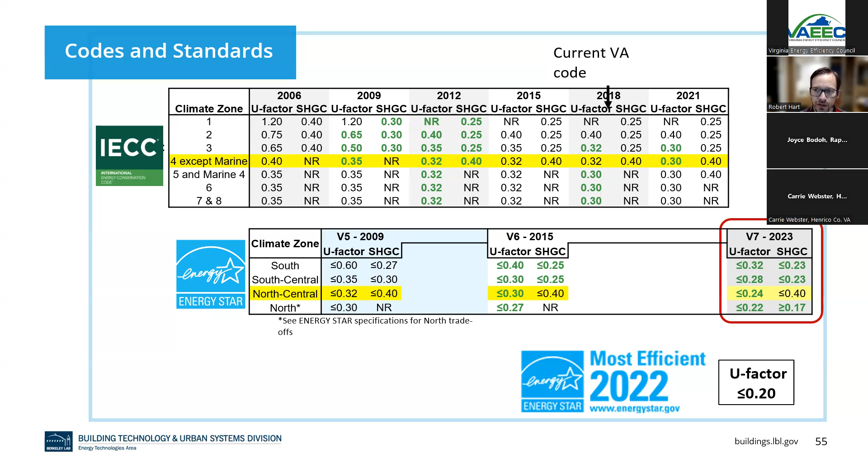So go ahead to the next slide, please. There's one additional item I wanted to highlight here, which is that there has been a slight change in the map from Energy Star. In version 6, and I apologize, that looks fairly blurry, but I think you can still make it out, basically all of Virginia in version 6 was North Central zone.

for Energy Star. In version 7, it has changed a little bit. You can see there are a couple counties that are in the northern zone, and a few, I don't know if that's one county or multiple, sorry, I don't know Virginia very well, but that have moved to the south central zone. So a majority is still north central, but you do have a couple pockets where it's north or south central. So that's something to consider if you're working on projects in those areas, that the Energy Star requirement is actually going to be a little bit different there. Go to the next one, please.

Somebody noted it's multiple counties. Yeah, thank you.

Before finishing off on these codes and standards, let's look at where things are going. You saw the movement in the Energy Star space. If we look at the next IECC version, the 2024 IECC, which is currently under consensus committee process, it's going to move into that void now created. At least at the current proposal, which I think will be accepted and finalized, it's going to move into Energy Star version 6 levels.

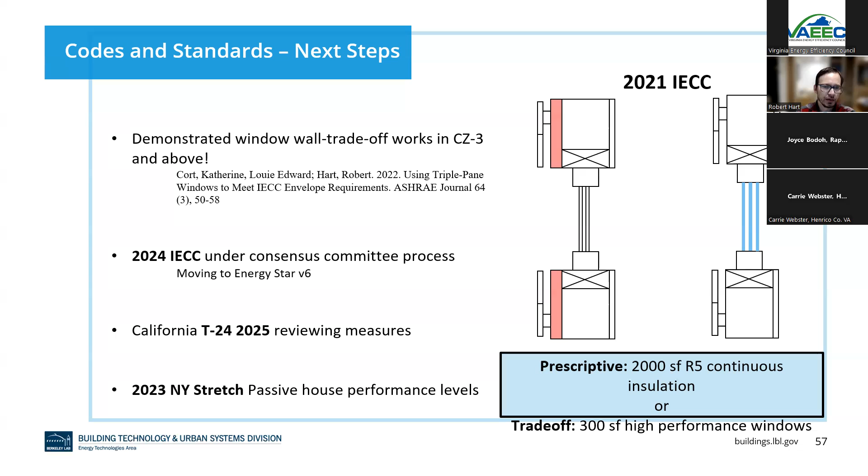If you're interested in a deep dive on achieving Energy Star and the technology needed to get there, I did a few presentations for NFRC, the National Fenestration Rating Council, on this. It gets pretty technical, so I didn't want to dive into it here, but if you're interested, these slides are available—feel free to check out these YouTube links to get a deep dive into how manufacturers can hit these performance targets.

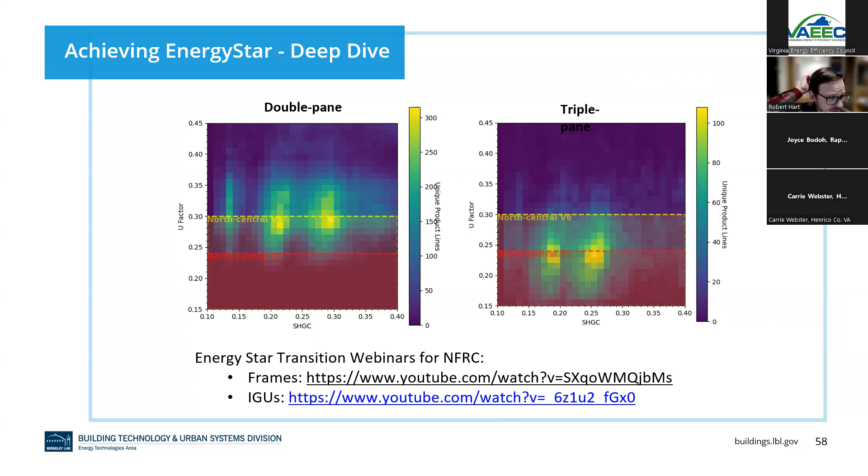So here I'll do the quick summary version. That's the 0.30 level that's being utilized now. This is your typical vinyl window with one low-E coating, a solar control low-E coating, with argon gas fill.

The difference now to that 0.24 level, which Energy Star is moving to, is the addition of a second low-E coating. This is a room-side low-E, often called the surface 4 coating, being added to the window. So you're adding one more thing, which adds some cost to the window. You'll also see higher performance spacers, or warm edge spacers, being utilized in these products. So that's the technology jump there.

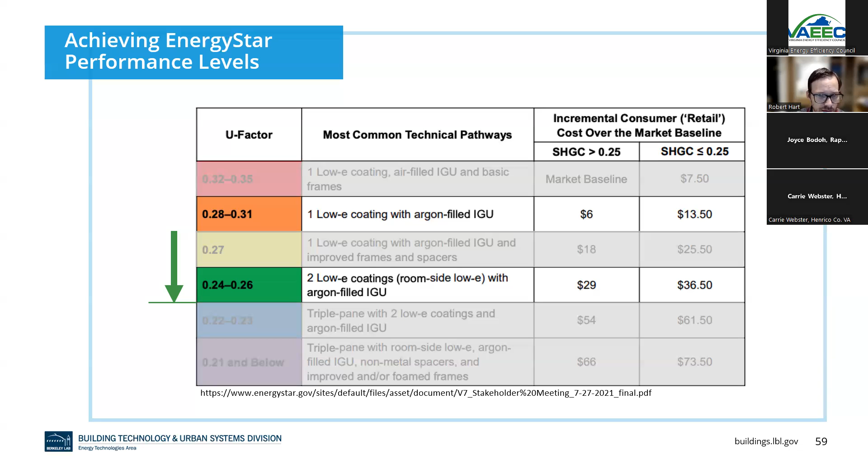So here's a summary of the two technologies that would be utilized to do that. That room-side low-E coating, which I talked about, is a widely available technology. It's been around for a long time, with multiple suppliers. The cost right now is more expensive than a typical low-E coating.

Initially, with the launch of Energy Star, this might get more expensive with demand going up, but the coaters, the glass manufacturers, are going to invest in broadening these lines. It's going to become more of a mass market product. We anticipate the cost ultimately coming down, the incremental cost for that coming down in the long run.

Triple pane windows are obviously another option to get there. Again, a product that's not sold very much in the US—only about 2 to 3% of the market share. Although the technology has been around a long time, and there are a lot of manufacturers that actually have certified products, they just don't sell them.

If we look at the database from NFRC, more than 190 manufacturers have more than 400 product lines certified, and this is just vertical sliders, not to mention all the other product lines certified in the US. So the manufacturers are prepared to do this, they just haven't done it at scale right now, so the incremental costs are quite high. If that market changes, demand changes, and they invest in their technologies to produce these at higher volume, you'll see those costs come down quite a bit.

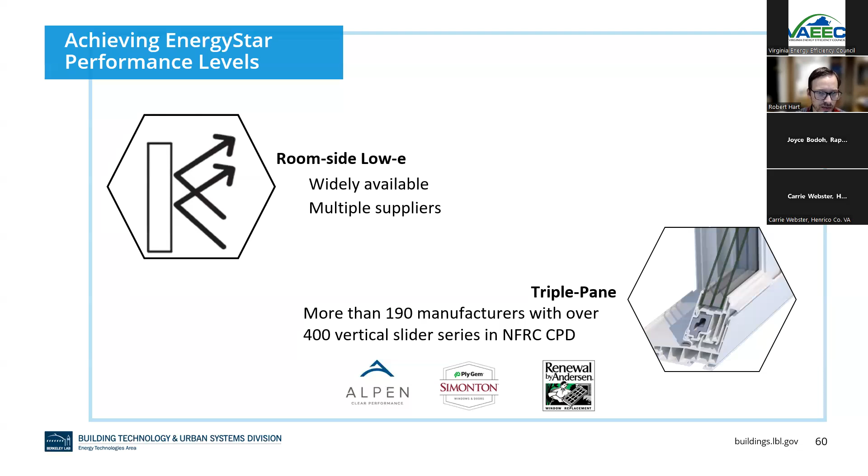One technology we've talked about for the last few years, and worked on with different manufacturers, is this idea of a thin triple window. The idea being that with a typical triple pane, you hear a lot of complaints about them being too heavy, too wide, too expensive. The thin triple is a way of addressing some of those problems.

The idea is somewhat of a drop-in replacement—the insulating glass unit can go into an existing frame that was designed for double pane. This means a low entry cost for window manufacturers. You get double the insulating glass performance with minimal weight increase. This is still a viable solution, and we're doing some demonstration projects. A few manufacturers have launched products with this technology, and we expect more in the next few years.

There have been some modifications to that. When we started this work, Krypton gas was very cheap and accessible. In the last few years, that has not been the case. Most of the Krypton gas is manufactured in Russia and Ukraine, for example, so that market is very volatile right now, and manufacturers, not surprisingly, are not willing to invest in something that volatile.

So there have been some modifications to the design—I won't go into all the details here—but there are solutions, and manufacturers coming out with products that more closely resemble a typical double pane window in weight and handling, while still achieving triple pane level performance.

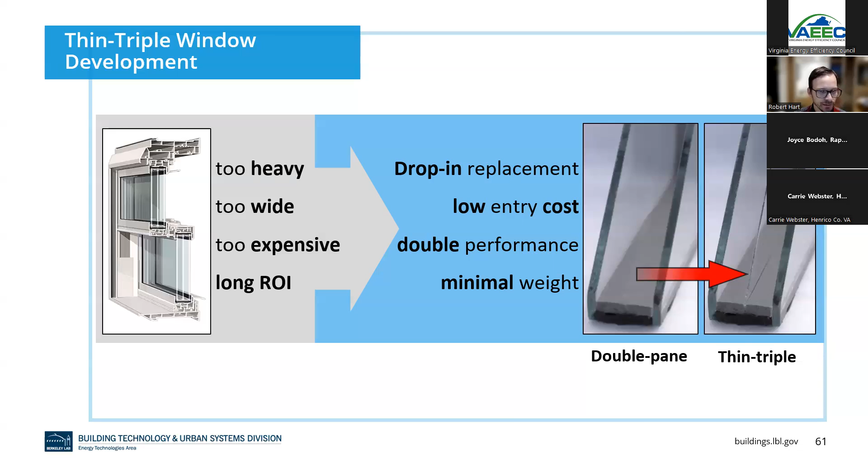I just wanted to touch on that. I've been focusing on the windows themselves here, but there are a lot of other technologies that allow, especially on the retrofit side, high energy savings out of the windows. So secondary glazings, whether that's on the outside, often called storm windows, or on the room side, which are window panels or secondary glazing on existing buildings, can give you quite a bit of energy savings at a lower cost than installing a new window. So that's always a very good option, especially in climates like Virginia.

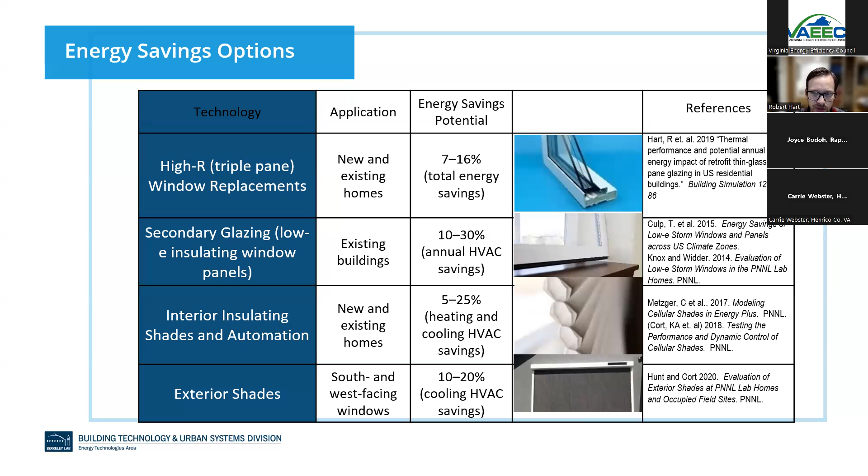But also shading systems, both interior and exterior, do a very good job, especially if you're concerned about overheating or solar gains. They do a great job of reducing energy use as well.

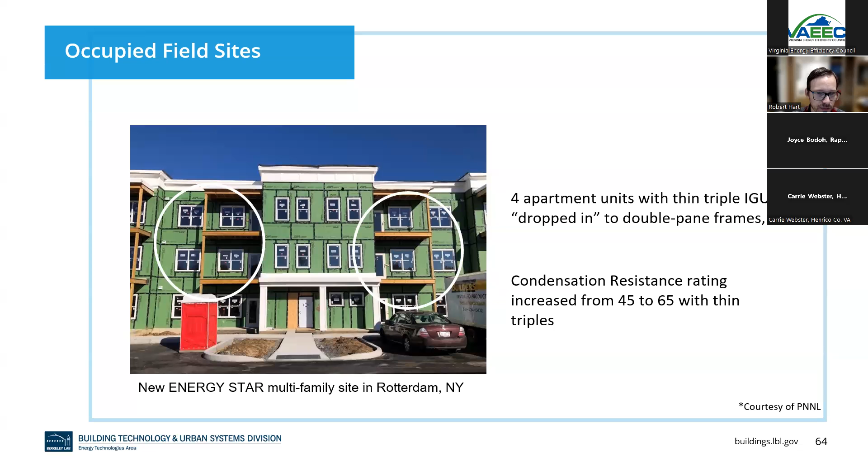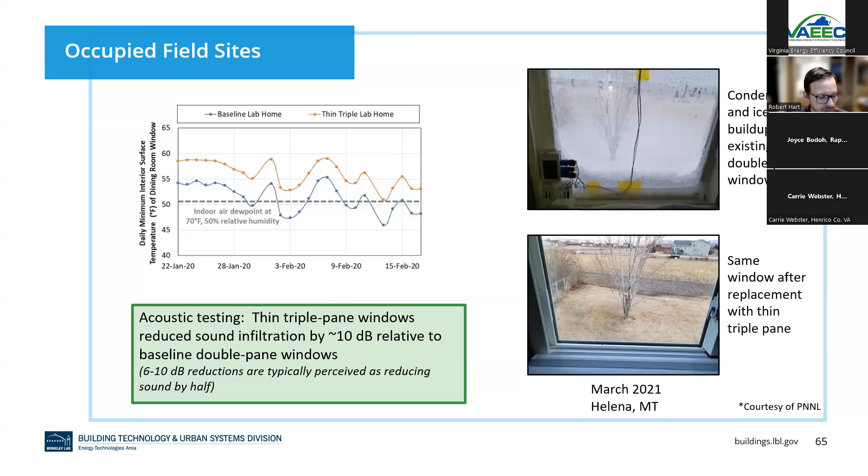We've just started this project. We're baselining the units right now, doing a year of data collection with the existing windows, and we're about 4 months into that. After 1 year, we retrofit with triple pane and do another year of data collection with the tenants to get a very good understanding of how this impacts their space and usability.

With a particular focus to these low-income communities. Go ahead to the next one, please.

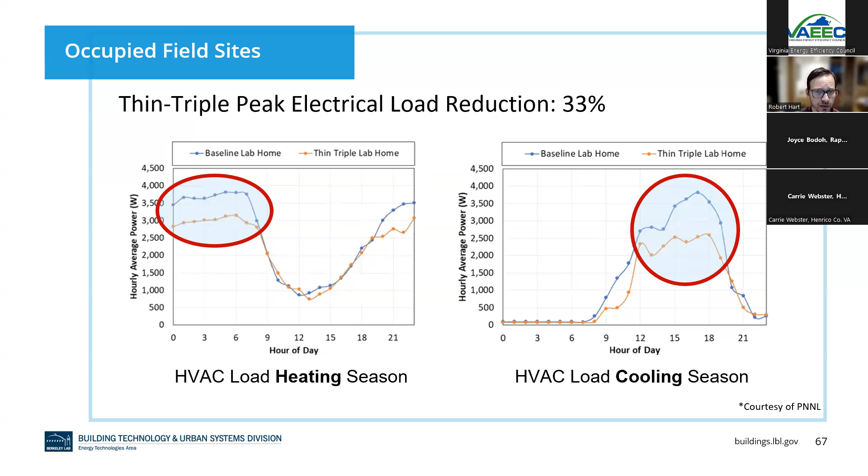And on the cooling side, this has somewhat to do with the insulation, but also the solar control level of these windows, so you have a lot lower peak for your cooling, being able to reject solar gains quite a bit better. So you get the best of both worlds: the morning warm-up in the heating season and the midday peak in the cooling season, where you're reducing these loads. Go ahead to the next one, please.

So at PAWS, we launched last year with 50+ partners. This involves manufacturers, a lot of utility groups, and others. We have 3 working groups going on right now. Our utility working group has 24 utility programs already as members. We're working on how to launch market transformation programs within these territories, and it's a great group of folks interested in how we get high performance products into their markets.

We also have quite a few pilot programs going on with some large production builders, including Habitat for Humanity and a few others that are interested in trying out these higher performance products in their fairly large 100+ home developments. So a lot of interest here, especially with these changes to Energy Star, in how we're going to get higher performance windows into the market. Go to the next one, but I think that was all I had.

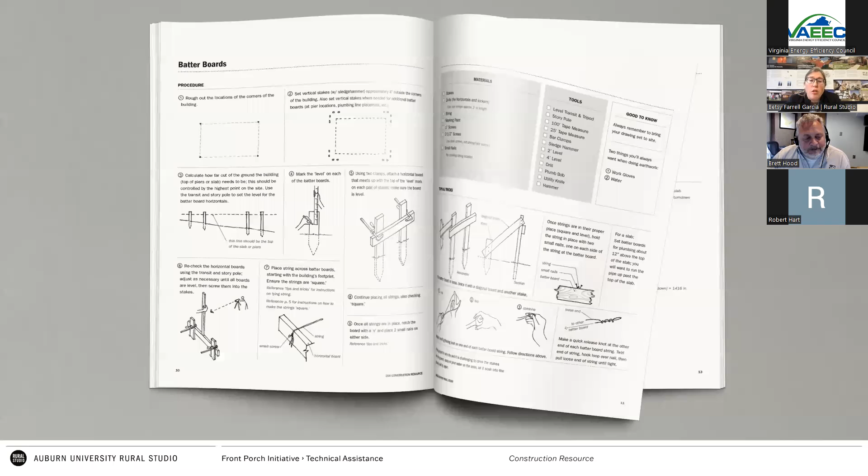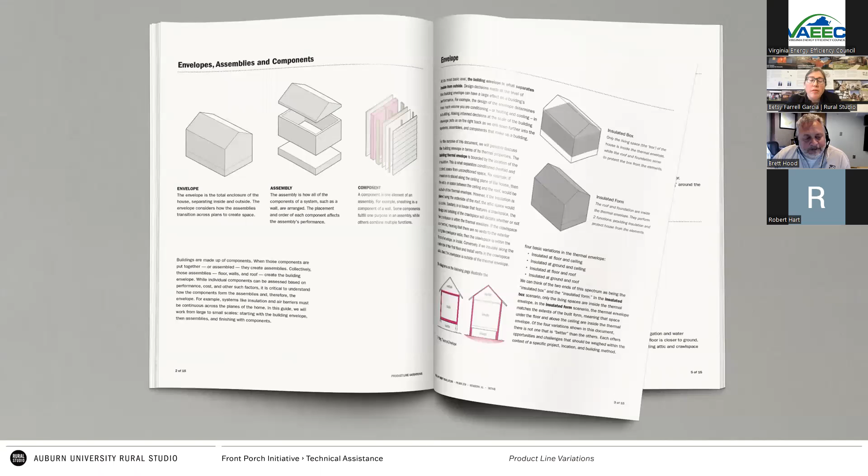Over the years, our team has developed an instruction manual that helps our students and partners understand the hows and whys of high-performance home building. As part of our technical assistance program, we've developed a library of materials illustrating the range of variations possible. We understand how to design to a high standard of building performance and can measure the impact different assemblies can have on that performance.

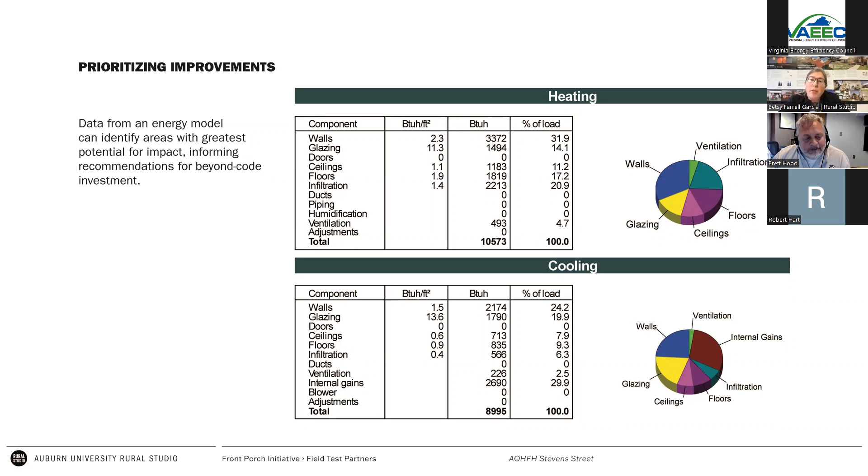Ultimately, we aim to study the relationship between high performance building and affordability, and how one can affect the other. Affordable housing often focuses on lowering the initial construction cost to the detriment of building performance. We seek to find the balance point between the upfront cost of improved performance and the back-end performance consequences or benefits.

By investing in improved efficiency and durability in a healthier home and surrounding community, can we lower the homeowner's energy bill and insurance premiums and reduce chronic illness? We began to wonder if we could shift a homeowner's monthly expenses to investment in improved performance. Although it would cost more initially, we hypothesized that a high-performance house would actually cost the homeowner less over time. Moreover, we know the benefits extend beyond the homeowner. Research has shown that energy efficient homes are less likely to go into default, which creates value for lenders.

Resilient homes save an average of $4 for every dollar invested, and have a higher resale value. We also know healthy homes influence occupants in a number of ways, including a reduction in sick days, a benefit to employers, and fewer doctor visits, a benefit to insurance providers. We also know that communities that remain intact are stronger, such as multi-generational kinship networks that offer elder and childcare, as well as shared transportation and food. And many of the principles for one goal overlap those of another.

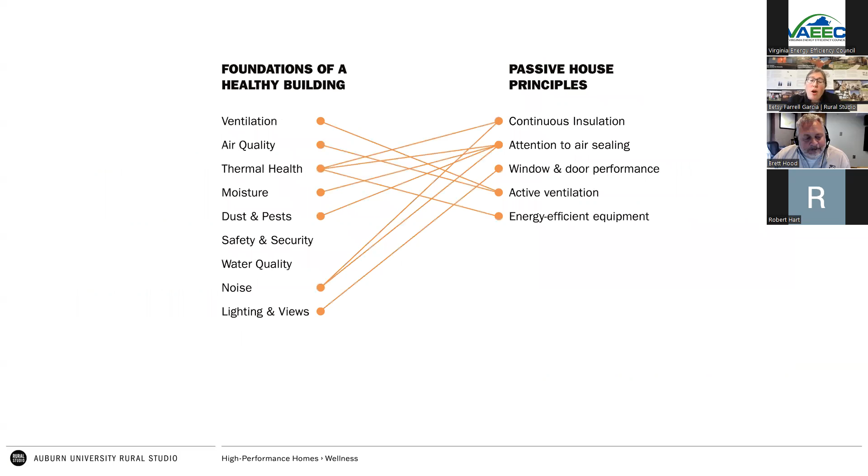We're currently working with a network of housing providers across the Southeast in climate zones 2, 3, and 4. Front Porch Initiative provides the information, knowledge, and know-how to help our partners make informed decisions regarding both the quantitative and qualitative aspects of building performance, so they can provide energy efficient, resilient, and healthy homes to their clients. Today, Mackenzie and I will share case studies with two of our housing provider partners and close with key takeaways we're incorporating into our ongoing work with partners.

One of our early partners, Auburn Opelika Habitat for Humanity, is the Habitat affiliate nearest main campus, and they offered us an opportunity to integrate a research project into the design and construction of two of their recent homes. This research investigates the relationship between initial construction cost and ongoing operating costs related to energy performance. To minimize variations in built performance, we identified two lots on a common street and constructed two of the same houses, a 900 square foot, 2-bed, 1-bath prototype.

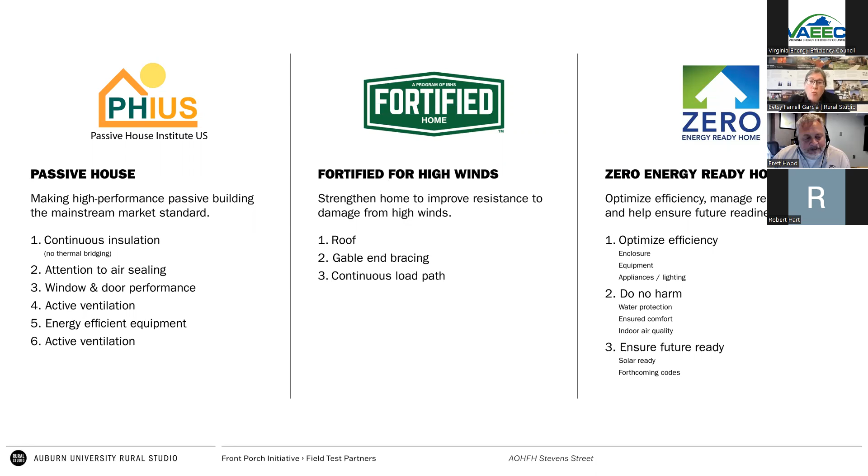They're built to two different energy standards and the same structural resilience standard. We elected to build to the more stringent standard first, then applied our understanding of the PHIUS standard to construct to the Zero Energy Ready standard, reducing construction costs while maintaining as high a performance as possible. Our students ensured that construction met each standard through a 4-step process: modeling, working through various assemblies computationally, testing the airtightness of the envelope at critical points during construction, verification of final performance through independent third-party raters, and monitoring energy consumption at the circuit level.

For two years, we monitored the energy required to heat, cool, and ventilate the homes, and tracked the cost of that energy consumption for each house. We focus on the energy needed to condition the interior since it's most directly related to how the house is built. We then identified the added construction cost of key building systems needed to meet each standard, and found that the added construction cost to meet the higher standard, taken as a cost increase on a monthly mortgage payment, did not result in similar savings. This proves that we could achieve comparable performance at a much lower cost premium.

Finally, the PHIUS standard requires a small solar array to offset some of the energy use of the home. This PHIUS house is unique because it's the first house in Opelika, Alabama to have a bidirectional meter, eliminating the need for costly batteries. The project team petitioned the local power co-op to allow this meter, and the policy changes made it possible for other homeowners in town to install their own solar arrays, contributing to the economic stability of the wider community. Now, Mackenzie will share our second case study.

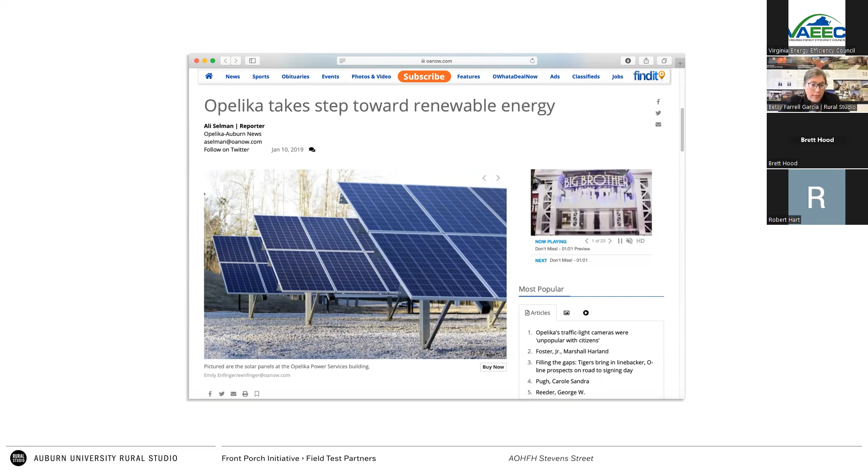This second case study that we're going to look at today is with Chipola Area Habitat for Humanity, and specifically a development of four homes in Marianna, Florida. For this project, we integrated learning from the project with Auburn Opelika Habitat for Humanity around efficiency and resilience, and we expanded our research around both workforce and finance.

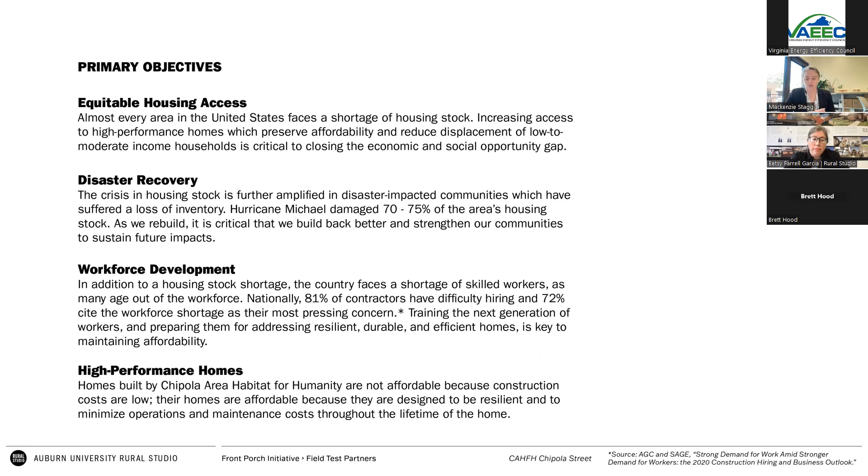Early on in the project, we identified four primary objectives. First, to increase opportunities for equitable access to homeownership. Second, increasing the area's housing stock as part of the recovery from Hurricane Michael, which damaged or destroyed a significant portion of the area's housing stock. Third, to build a skilled local workforce trained to both recover from disaster events and to mitigate future shocks. And fourth, build high-performance homes that continue to be an asset for the homeowner.

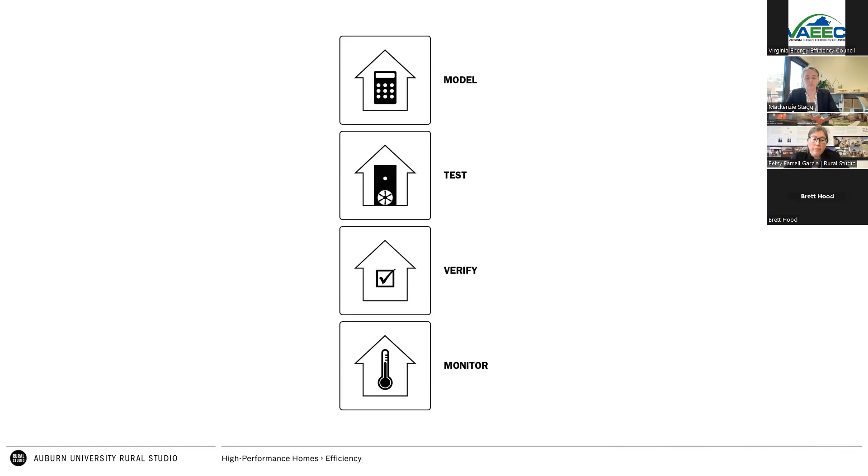We utilized the same model, test, and verify approach that was developed when working with Auburn Opelika Habitat for Humanity, and this has become an approach that we have used with all of our housing provider partners.

The Beyond Code certifications that we chose to pursue on this project were tied to funding opportunities for the housing provider and the financial institutions involved in the project. For example, Chipola Area Habitat was able to receive funding for development when building to a Beyond Code energy standard. We'll talk more about this later, but energy certification also had benefits for the financing of the home.

Chipola Area Habitat for Humanity also received a grant from Habitat International's Habitat Strong program to pursue fortified certification, which is about resistance to storm damage. However, they received this funding after the first two of the homes were already under construction, which necessitated rebuilding some small pieces of the project.

If at all possible, we would suggest that it's best to set expectations about certifications in the design phase of the project. However, just as a side note, since Florida has some of the strongest building codes around wind resilience, the modifications were not as strong as they would have been in another state, and that was part of what made them possible.

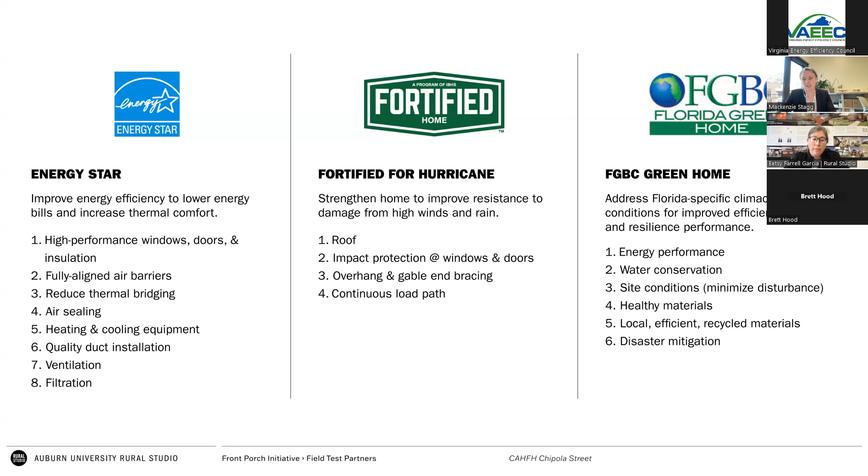Lastly, this was the first time that our team had utilized the Florida Green Building Coalition's Green Home programs. Like LEED, this is a points-based program. What we found particularly interesting about this standard, which is a statewide program, is that it accounts for both energy efficiency and resiliency in the points.

One of the new aspects of this project was the integration of a workforce development program. Students from the nearby Chipola College's Building Construction Technology program were integral to the construction of the homes.

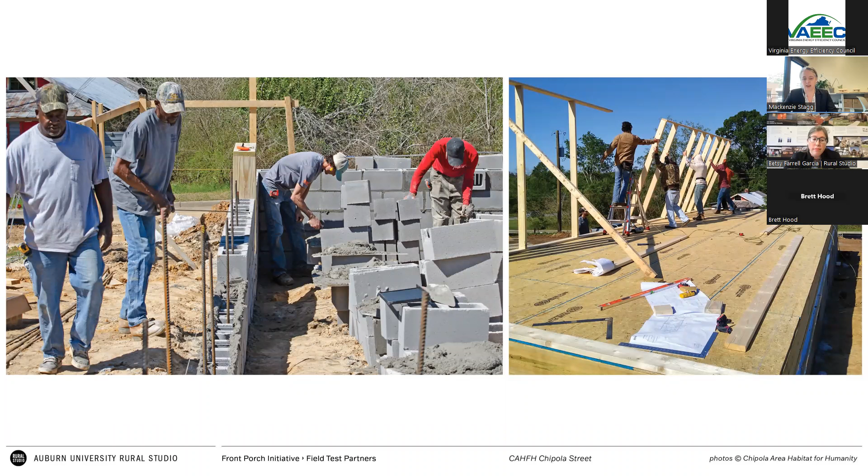The students would normally perform their hands-on training work in the lab on their campus, where they would earn clock hour credits towards the completion of nationally recognized construction certifications. However, with an agreement put in place between Chipola Area Habitat and Chipola College, this allowed the students to earn these clock hour credits while working on site on the Habitat for Humanity houses. This also allowed them to interface with local tradespeople and subcontractors who would potentially become their future employers.

This relationship came at a crucial time for Chipola Area Habitat. The Chipola students came on board just as the pandemic was limiting the out-of-town volunteers that had traditionally helped build the homes. Chipola Area Habitat, in turn, was able to provide all of the materials and resources necessary to construct the homes, which meant that Chipola College had more resources that they could dedicate towards the program instead of purchasing materials.

Not only were the students learning to build the homes, they were learning to build energy efficient, resilient homes. And this partnership is growing that skilled workforce trained to both recover from shocks and build back better to mitigate future events. Our contribution was to provide the prototypes, homes, and the technical assistance needed to build these high performance homes.

Another aspect of this project was taking a deeper dive into the capital stack of the project to understand how to build these homes in a manner that made them affordable both to purchase and to operate.

One of the biggest breakthroughs in the project came in the ability to value the sweat equity that was put into the house by the homeowner, the volunteers, and the students, and utilize that as a down payment in the home. Now, my background is in architecture, not in finance, but I'm going to try to illustrate at a high level how this process works.

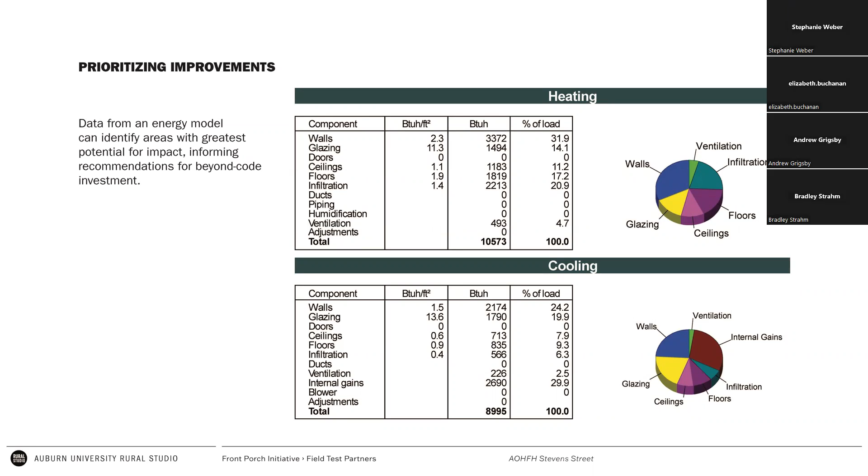For example, if the manual J shows that the walls are a large component of the heating and cooling loads, then increasing insulation may be a more effective strategy than purchasing higher performance windows. However, that's not always the case, as our last speaker was alluding to, relative to high performance windows. So these kinds of models that are specific to a location can really help develop a response that's most appropriate to that house.

Second, once you determine which certifications you're pursuing, it's good to ensure you understand both the installation and the evaluation process for those certifications.

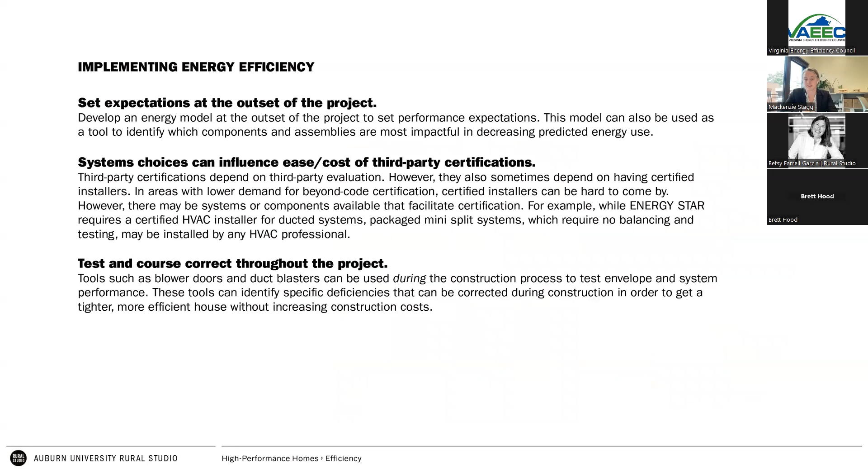For example, one of the Energy Star requirements is that a certified HVAC installer install the HVAC in the home. In rural areas, and areas with less demand for these beyond-code certifications, those installers can be hard to come by or travel from long distances, both of which tend to increase the cost.

However, with the size of these homes and the kind of high performance envelope used in them, we were able to utilize a ductless mini split system for the heating and cooling of the home. Because that's a packaged system and does not require the balancing and testing of ductwork, we were able to have the local HVAC installer install that system without needing the Energy Star certification requirements. So understanding how these systems influence that, these beyond-code certifications can save money and resources on the homes.

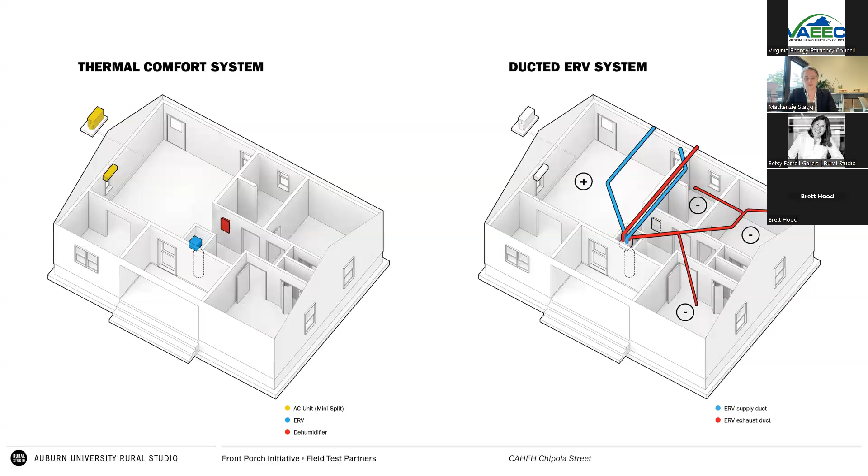The third thing we have found is that it's crucial to test and course correct throughout the construction process. For example, we found that blower door tools are excellent to use throughout construction to make sure the homes are well sealed and well insulated.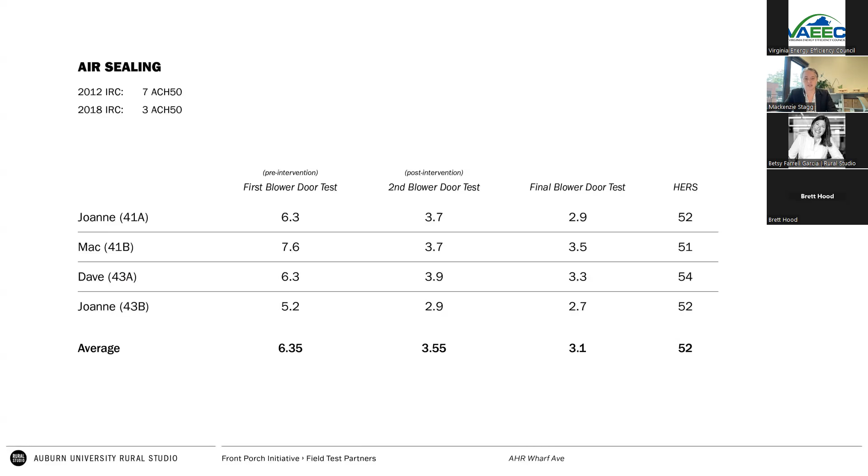So first and foremost, it's the adoption of current building codes. We once heard Sam Rashkin from the Department of Energy say that the worst house you can legally build is one that meets the current building code. So if you're using an outdated code, that's putting you even further behind.

There are also funding incentives, be they housing assistance programs at the state or regional level. Utilities have a lot of tools and many great programs working on retrofit programs, as well as, how Betsy mentioned, incentivizing the use of renewables with things like bidirectional meters, which are really key to keeping these energy efficient homes affordable. So next slide, please.

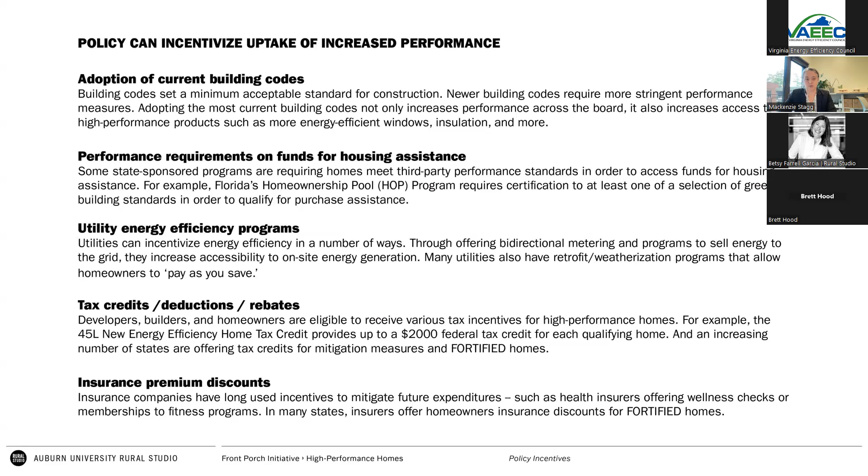So as was mentioned by the last speaker as well, ultimately the reason we're advocating for these high performance homes comes down to people. We believe these high performance homes are more comfortable, safer, healthier, and provide more economic stability. We also believe these homes are better investments for the insurer, the lender, and most importantly, the homeowner. So thank you guys very much for your time and attention today, and we look forward to any questions you might have.

Well, Betsy and Mackenzie, thank you very much. That was a wonderful presentation. And please allow me to say that's really incredible work that you're doing. That's great. Thank you.